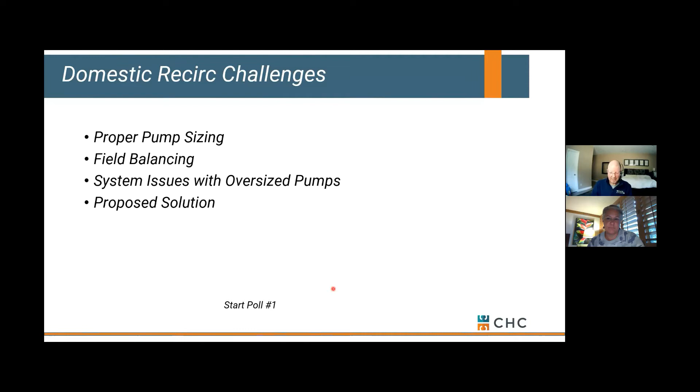Let me describe what happens in the typical hot water system. This could be a home, meaning a residence, could be light commercial, could be an apartment or a hotel, could be a multi-story high-rise, doesn't matter. It's all kind of the same as far as what's happening.

Every place that we have a load, this might be a shower, might be a hot water faucet, might be a kitchen sink, might be laundry. Each one of these might be a hotel room or an apartment. Any place that's using hot water, we're going to consider a load.

Anytime somebody is using hot water, cold water from the city comes in, picks up heat through our water heater, whether that's a storage tank or a tankless type, any appliance that's generating hot water, and we send that hot water out through our riser. It circulates out or gets pushed by city water and ends up at our load, which might be a shower again, or kitchen sink, you're washing your hands, okay?

That's what's happening in a typical hot water system. City water comes in, picks up the heat from our water heater where we're storing it as hot water, and then sends it out to our system where we can use it, okay?

But what happens in the middle of the night when everybody goes to sleep, assuming this might be a hotel? The exception might be Vegas, but at 2 in the morning when most people are sleeping, and there's no load going on in the building, everything kind of goes stagnant or no flow at that point. If there's no load in the building, there's no water flowing.

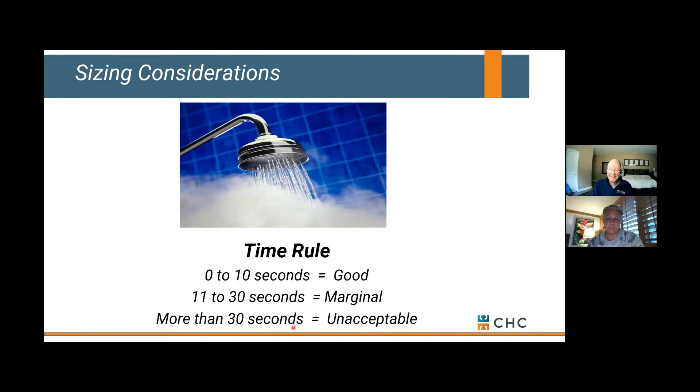Now, if they're getting hot water to their shower, that would tell you that the water heater is working. But if it's taking them 10 minutes to get hot water to a shower in the morning, it would tell you there's a problem with the recirc. Think about it - if the recirc's not running or there's an issue there, then all this water that's in the riser that has cooled off overnight has to get flushed down the drain before the hot water can replace it and end up out here at the furthest fixture. So that can lead to quite a delay.

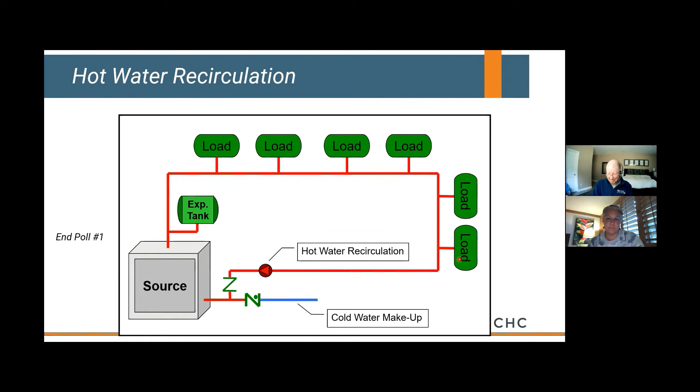That's all that's happening in our domestic recirc. Let's talk about how we size that pump. Again, all we have to do is overcome the heat loss that's occurring in our main riser when there's no load in the building, and that line's basically stagnant.

There's a heat loss table we can reference. We can also use industry rules of thumb for delta T, or change in temperature between what we're sending out to the system and what we'd like to see come back on our recirc. Typically that's a 5 to 10 degree delta T - 10 is a lot more acceptable. If you look at a master mixing valve, a lot of those require at least a 7 degree delta in our system. They need a source for cold water, which means we can't come back too hot with our recirc, or this valve starts to hunt and has some operational challenges.

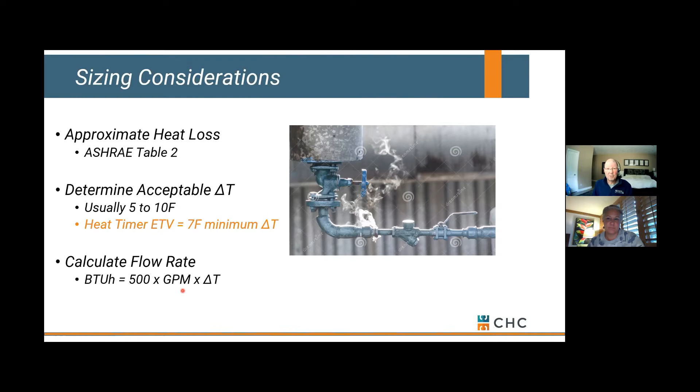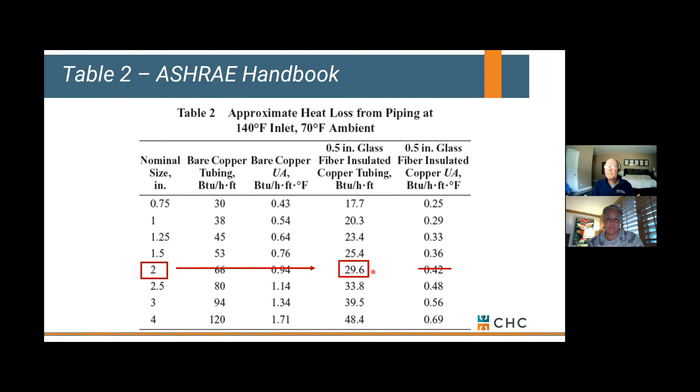If we know our heat loss in BTUs and we know the delta T we'd like to see in our system, we can figure out our flow rate for our recirc that's in question - that's all we're doing here. So we could look at a heat loss chart. Let's assume we've got a 2-inch riser that has half inch insulation around it. Well, that 2-inch riser can lose roughly 30 BTUs per foot. So all we have to do is figure out how much piping we have, and we can figure out what our heat loss is.

So quick example, let's assume I've got a building with 500 feet of 2-inch main riser running through our system, and I've got 500 feet of piping total. It loses 30 BTUs per foot. So 30 times 500 gets me to a total BTU loss of roughly 15,000 BTUs.

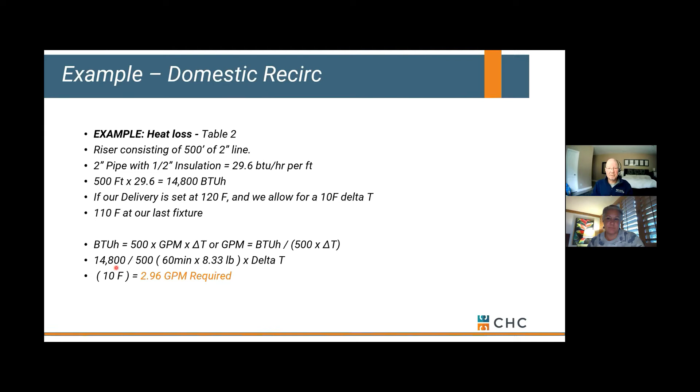Okay, so now I've got a pump sized for 3 gallons a minute. Pressure drop through a 2-inch line is going to be very minimal at 3 gallons a minute, it's sized for much larger flow rates. But what I am concerned about is from my furthest load back to the mechanical room or back to my water heater, what line size am I going to use for this section? It's typically not 2-inch, it's usually a half, 3/4, or 1-inch. We're going to size that based on the flow we need for our recirc pump. In this case, 3 gallons a minute.

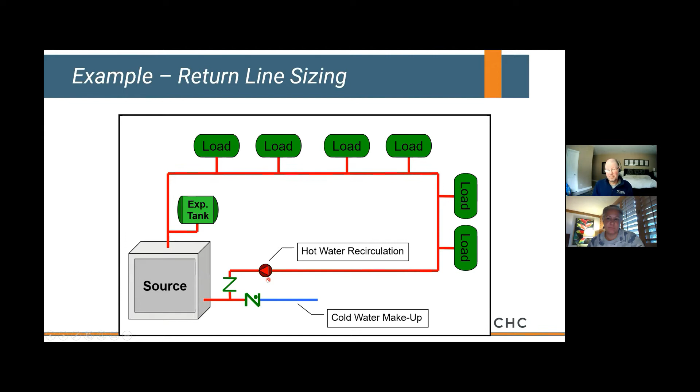So we can use our System Syzer, or an electronic version of that if we want to start looking at line sizes. If I run 3 gallons a minute through 3/4 inch copper, I get a pressure drop of about 2.8 feet per 100, or a velocity of about 2 feet per second.

Whenever we're doing domestic recirc, keep a close eye on velocity. We don't want to move it too quick. I'll get to that in just a minute.

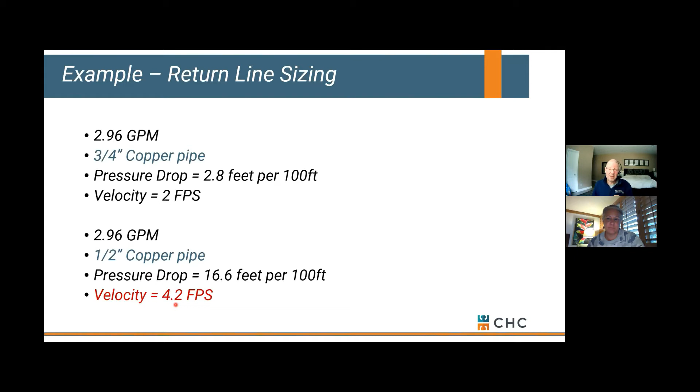If we choose a 1/2-inch copper pipe for our recirc line, again, from the furthest fixture back to the mechanical room, it can still handle 3 gallons a minute. The pressure drop goes up as well as the velocity, so I have to be careful on this velocity number. Again, I can use an electronic System Syzer to give that same condition. There's a number of tools you could use to figure out what line size you would choose or recommend based on a given flow rate.

Okay, so that's all we're doing here. Now, why do I care about velocity? Well, guess what? A lot of domestic recirc is based on copper pipe. And if you move water too fast through copper, you can erode it from the inside out, specifically around 90s, which is where you see very high velocities. As water is making a turn, it's pretty turbulent there, so velocity can be damaging to the copper because it's soft material.

So most people are going to, if your water is less than 140 degrees, be looking at a max velocity of 4 to 5 feet per second, so you don't erode your copper from the inside out. For me personally, I'm always looking at 4 feet per second or less, I just want to be safe. If you're starting to see pinhole leaks in your system, that's a pretty good indication that you've got too high a flow going through it. If you're doing really hot water, like to a kitchen or laundry that needs 160, 180 degrees, you want to slow that down even more because you've got air in that water, it's hyper aggressive. So watch your velocity, and if you're having pinhole leaks in a system, that's a good indication you're moving too much flow through it.

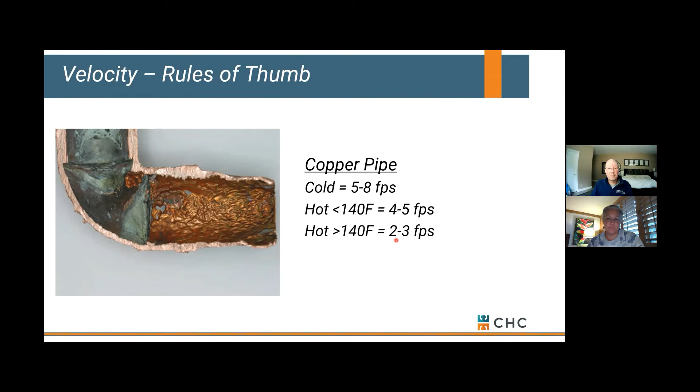Okay, so 3 gallons a minute is kind of our pump selection, and depending on that line length, if we assume 100 feet, we might only have 3 feet of head. So in general, we could pick a very small pump for 100 feet of line because we don't need a lot of flow in our recirc system. We just need to overcome the heat loss.

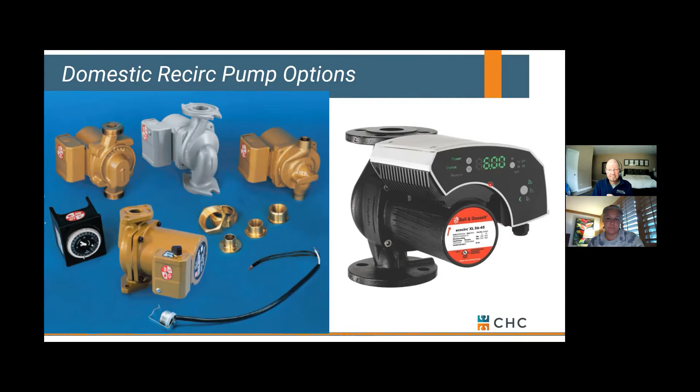We could either use a standard little wet rotor circ, or we could get into a smart pump, kind of an ECM control if we wanted to. This would allow you to control based on return temperature, so the pump would speed up or slow down based on that 10-degree delta T we're trying to maintain. You could also do the same thing based on pressure, so if pressure increases in the system, we can slow the pump down. Depends how we're going to balance things. But either way, we get a very small pump for what we call our domestic recirc.

The other thing we have to keep in mind is how are we going to balance our various floors. If it's a single-story residence, that's pretty straightforward. But if you're a 3-story hotel or apartment building, water takes the path of least resistance, so water tends to flow through floor 1 and right back to your water heater.

If you're on floors 2 or 3, you might have some delays in getting hot water. So how do we get our recirc up to floors 2 and 3? Well, we start to choke down a balance valve. As we do that, we make it harder for water to flow through floor 1 and easier for water to head up into floor number 2.

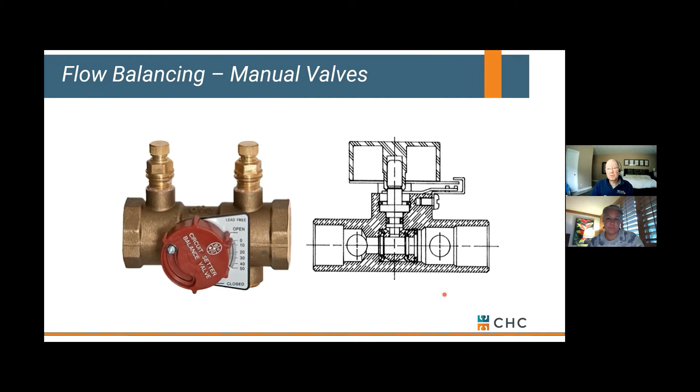You could also look at some type of automatic flow control device. These tend to be ordered with a fixed orifice, so you could select each floor for half or 1 gallon a minute, whatever you'd like to see on that particular floor. It's a spring-loaded cartridge that fluctuates with pressure to maintain a set flow. You're going to have a higher pressure drop across this valve, but they kind of self-balance once they're installed.

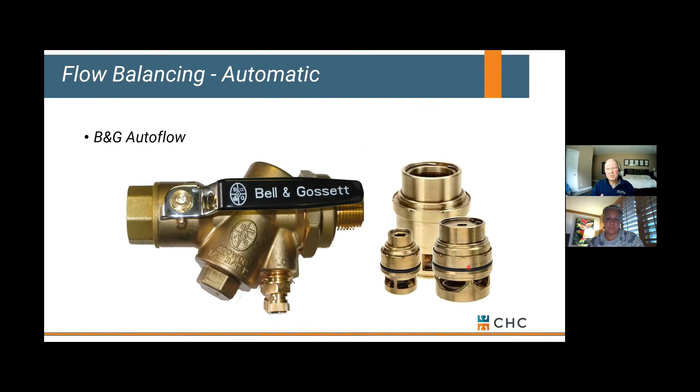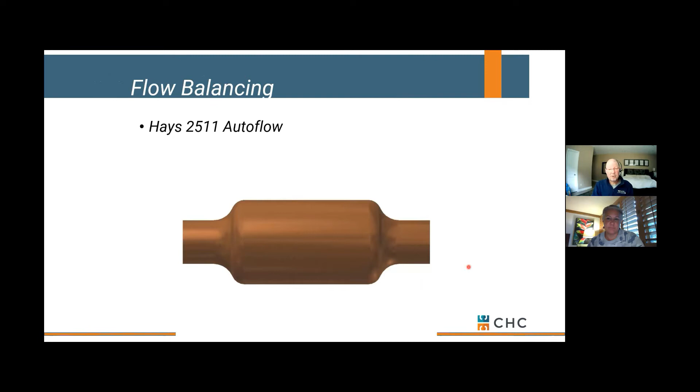Some manufacturers also offer you a copper autoflow. Basically it's a piece of copper, and if you open it up, there's an autoflow cartridge inside of it. We're not worried about low lead concerns since it's all a copper material. Very easy to sweat in line, and you're off and rolling.

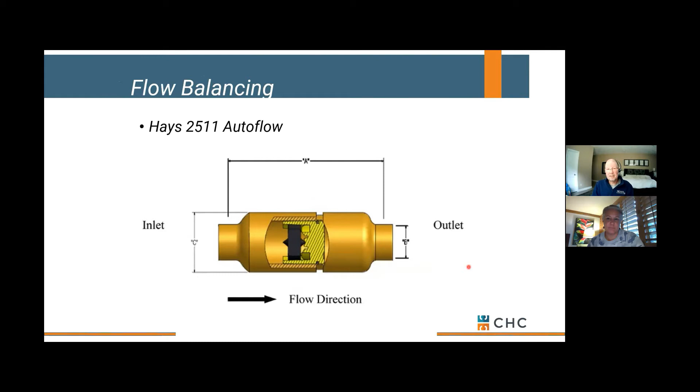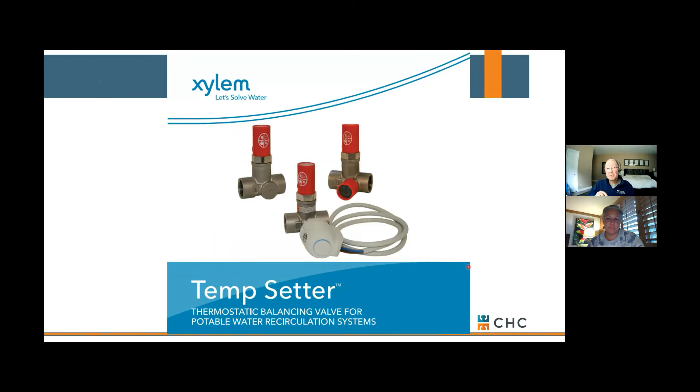If you're looking for a smarter option, B&G does make something called a temp setter. It's a wax-filled element that will allow water to flow or not flow based on return temperatures, so it kind of modulates itself. It's a smart valve. It always has a minimum flow going through it, but if your riser cools down, it's going to open up and allow more flow from your recirc pump. As we get close to set point, it's going to slow itself down or modulate itself close to closed.

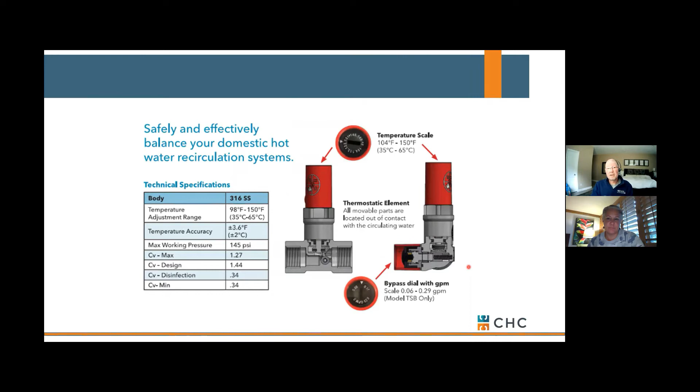This plays very well with an ECM or a smart pump where you could stage that based on pressure and let your pump speed up or slow down as this valve opens or closes. Okay, all different options as far as flow balancing.

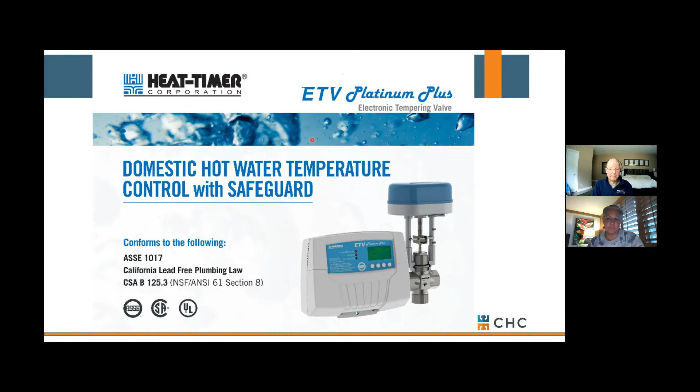With a master mixing valve, one of the things you'll see when you select a certain valve size, we tend to pick them for a 5-pound pressure drop based on a set flow rate. So whatever our design flow is through that 2-inch riser, we're going to pick a master mixing valve to match that. The thing to be careful about - a master mixing valve might require a minimum recirc flow.

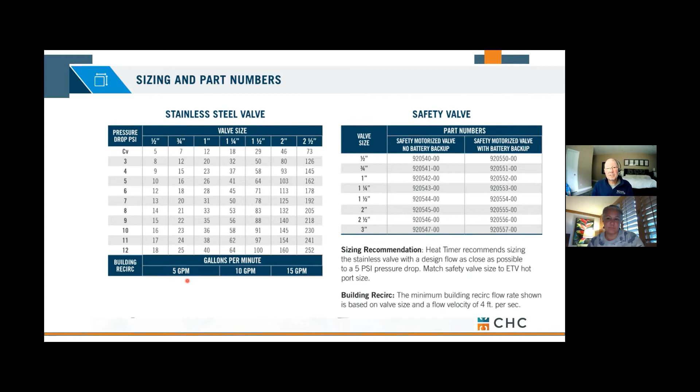So even though we've calculated 3 gallons a minute, the master mixing valve might require 5 gallons a minute. Is this a problem? As long as we account for that line size, if we size our recirc line for 5 gallons a minute, not 3, we should be just fine. There's a number of factors in sizing that recirc - one of them might be what's the minimum flow required by our master mixing, regardless of what's happening in the system. It's just a matter of balancing that out.

All a master mixing valve is doing is taking some hot water that leaves our water heater, and it's blending it with cold water coming from the city, or in our case, sometimes cold water coming back from our domestic recirc. That's why we need that 10-degree delta T to source cold water when there's no load in our system. That cold water mixes with the hot water to provide tempered water out to the system. So you might have 140 here leaving the storage tank, and 110 coming back from our recirc, with the goal of providing 120 out to the system.

Pretty simple, but it gets screwed up all the time. A lot of it has to do with not only how we pipe the master mixing valve, but how we tie the recirc back into it. The recirc has to be able to flow not only through the water heater, but also to the master mixing valve.

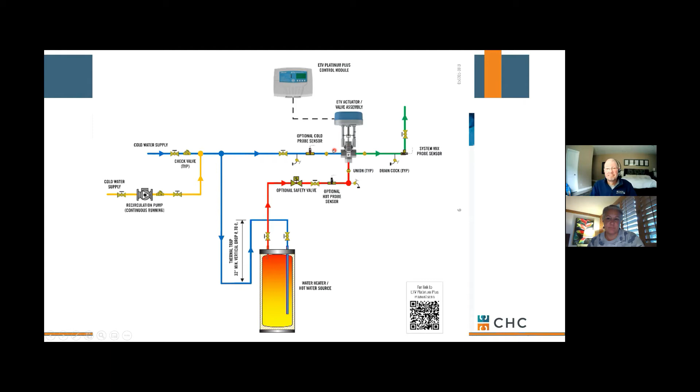I'm going to fast forward through this, but we're just showing an open versus a closed system and the source of cold water going to that master mixing valve.

Forgive me, a bit of a crash course. If we can help with recirc issues - one thing I haven't touched on is various pressure zones, like a high rise, like the Bellagio shown behind us. There's different ways to approach that, but overall a recirc is very simple. You just have to make sure you don't oversize it. And when it comes to a master mixing valve, you have to make sure you tie them in together correctly. We see a lot of issues in the field from people who overlook that.

Sunday, are there any questions before we move into pressure boosters? There is one. We see a lot of engineers sizing the pump head per the building height instead of friction loss. Can you spend some time talking about the difference? Oh yeah, don't do that.

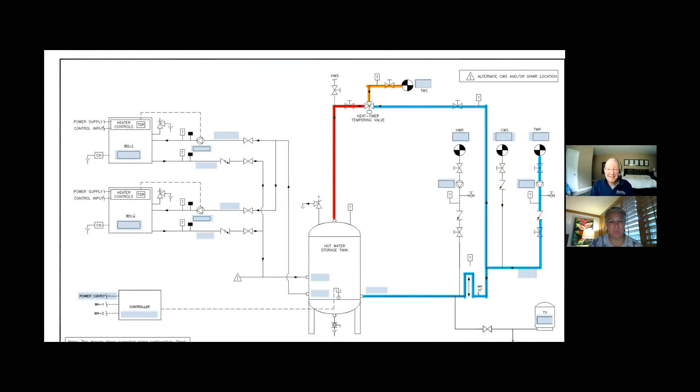Let me bounce back. Yeah, so just remember, this pressure drop through this recirc should really only be the line loss between the return line right here and the mechanical room. This pipe is already full of water - the city is taking care of that for you, or a pressure booster, depending on your system and how tall it is. But yeah, this recirc only has to overcome the friction loss between the mechanical room and the furthest fixture. So this is a friction loss - it has nothing to do with lift in the building.

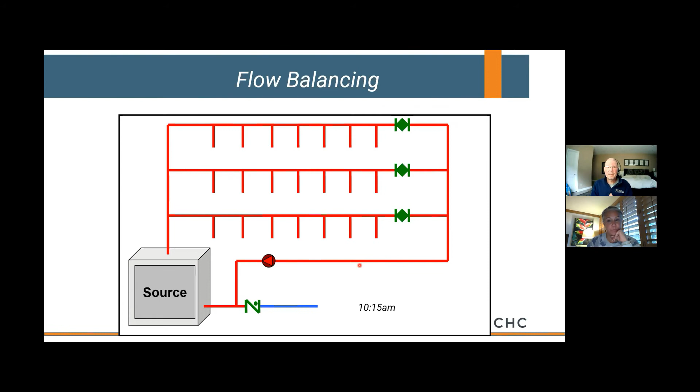So yeah, if we can help on an example, glad to do it. If you want us to run the math on how we would come up with a recirc size based on your riser diagram, happy to do it. It'd be a lot to do here today, but if you want to shoot us something offline, happy to get involved with that conversation for sure. Very good question.

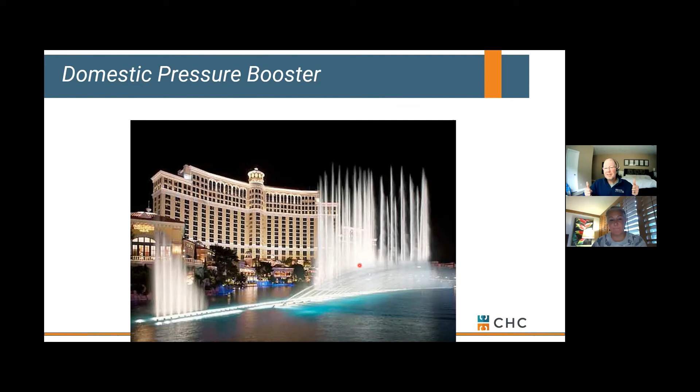We're filling a pipe full of water, and we're adding some pressure behind it. Typically you've got city water that comes into your building, and it's going to fill that pipe full of water. But sometimes your building's too tall, and you don't have enough city pressure to get it all the way to the top of your building. So what do you add? Something we call a pressure booster - simply a pump or set of pumps that run in order to maintain a minimum pressure up in our penthouse or highest spot in our piping. That's all we're doing with the pressure booster. We're boosting pressure - doesn't get much simpler than that.

We make it look really nice - it's a fancy skid, control panels with a lot of buttons on it, lights, alarms, things like that. But you break it down, it's a pump that's spinning to generate some pressure in order to maintain minimum pressure up in the penthouse. We're simply boosting pressure.

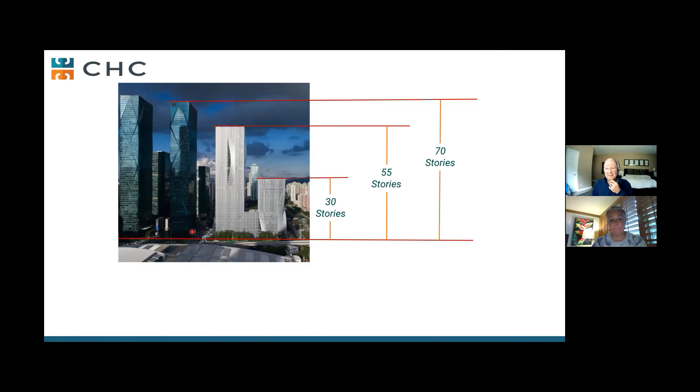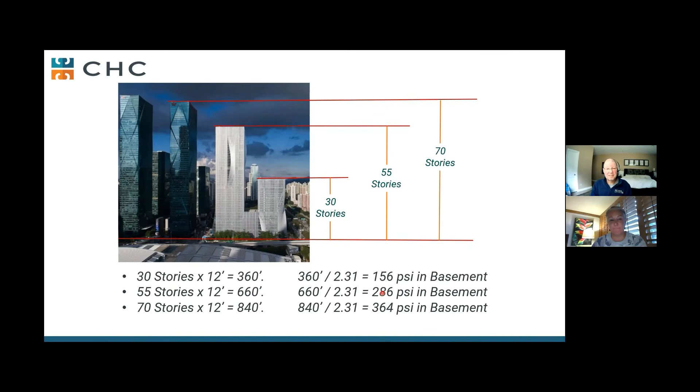Now, something to keep in mind - all of these buildings might require 30 or 40 pounds at the penthouse. But based on the height of the building, we're going to see a lot higher pressures in the basement of a high rise, a 70-story high rise, than we would a 30-story high rise. So our boost pressure, or the pressure seen in the basement, is going to vary dramatically based on the height of the building. Water has weight - if you're trying to maintain 30 pounds at the penthouse of a 30-story building, we might see 156 in the basement, or a 55-story building, we might see closer to 286 pounds in the basement. All that comes into what pump we select, max rating on our headers and components. All that needs to come into consideration.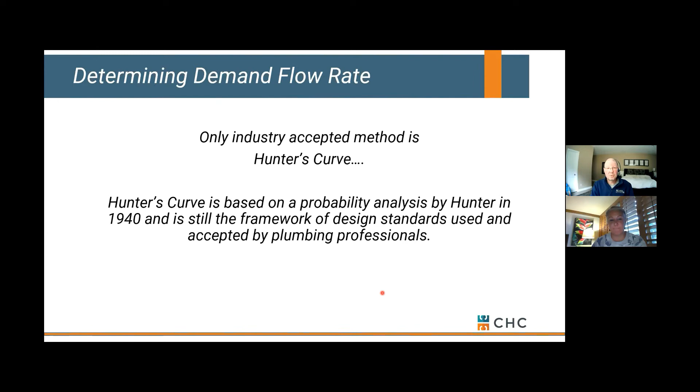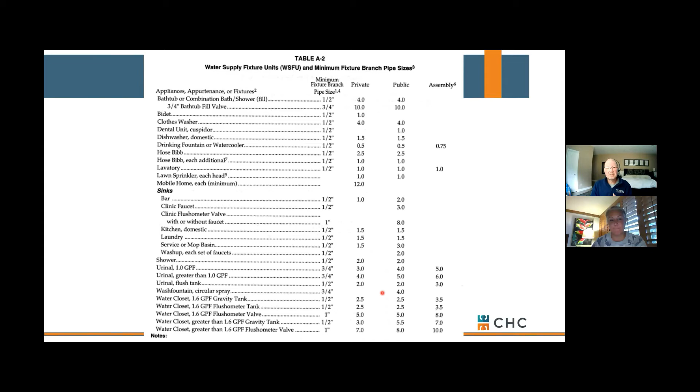Now, one of the things we need to look at first is how do we figure out our flow rates? What flow do I need out of my pressure booster? Well, that tends to fall on something we call Hunter's curve. It's established in the 40s, a very conservative selection if you will, but at this point it's one of the few industry standards that we have to roll on. Typically, all you're doing is totaling up your fixture counts based on how many showers you have, whether they're private or public - same with lavatories, laundry, kitchen. All those add up, and then you run it into Hunter's curve, and based on the number of fixture units that you have, that equates to a given flow rate.

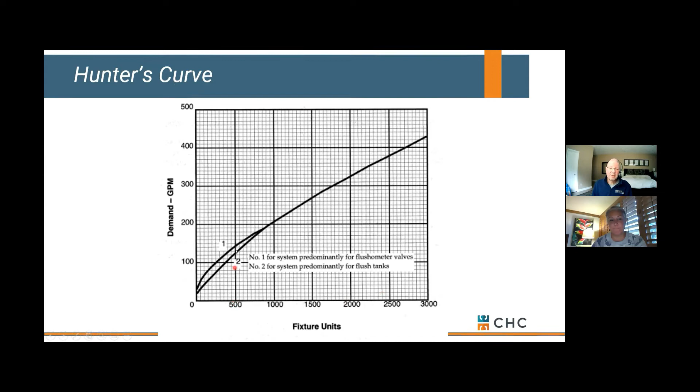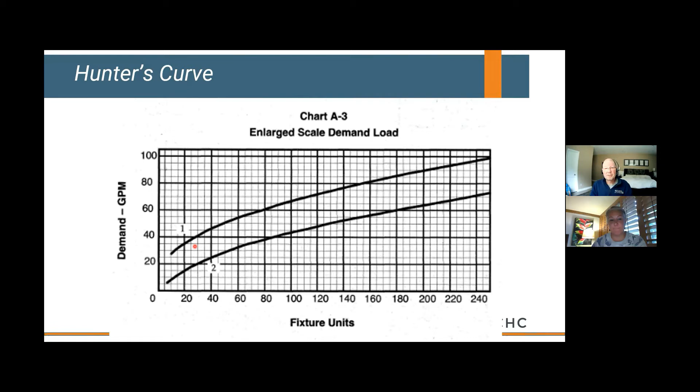Okay, and there's various scales for this, but they're all based on Hunter's curve. Typically for me, most engineers are giving me the flow rate. They're kind of responsible for that. Occasionally though, you'll get somebody who just wants to give you the fixture units and is relying on you to come up with flows. Hunter's curve tends to get you there.

Now, once you have flows, you have to figure out, okay, well, how many pumps am I going to use if I need a pressure booster system? Well, you could use just one pump. That's cool, until there's a mechanical issue with it. And then all of a sudden the building's out of water pressure, which isn't great.

Most people on the commercial aspect are looking at least two pumps, so if one fails, they still have another to kind of back it up. You could also look at a 3-pump or sometimes a 4-pump system.

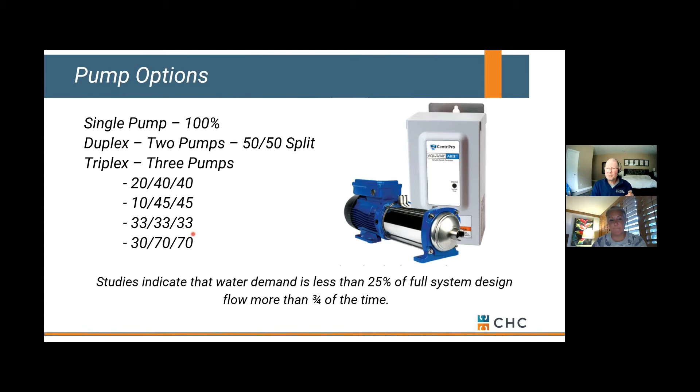One thing I should throw out real quick, a lot of these used to be constant speed. And as a result, we would see what we might call a jockey pump scenario, where you had a very small pump as kind of the lead pump, small horsepower, but it ran all the time. And if loads exceeded what that small pump could do, you would bring on a larger lag pump or backup pump. Now that we're going to variable speed for most of our pressure boosters, we tend to see equal splits, so we can equally rotate our pumps through and the horsepowers are consistent. But you might see that more in the field. If you see a very small pump, it's probably set up as a constant speed with a jockey.

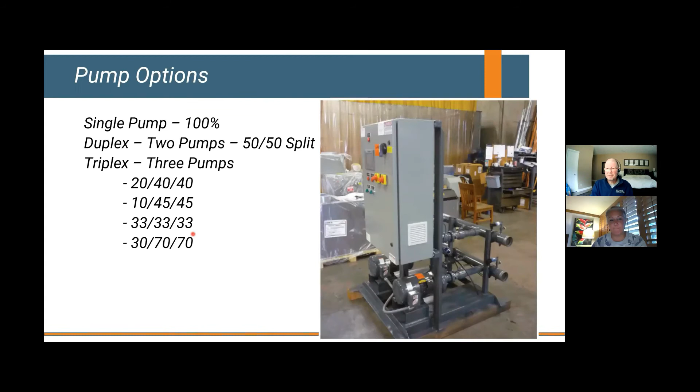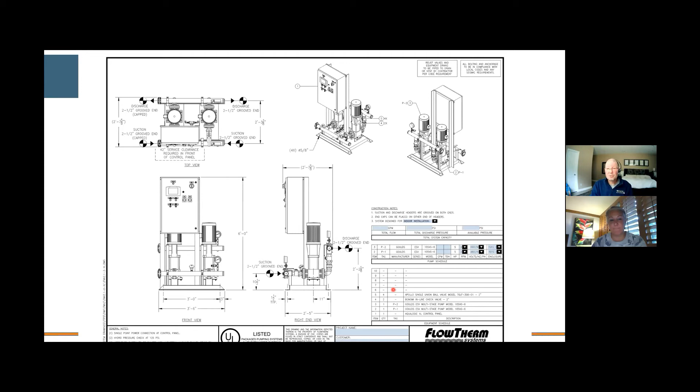You've got a lot of options. Whether you do, there's a lot of different configurations for you. I don't need to get into this real heavy, but you can go horizontal or vertical with your pumps based on floor space. You can go to a triplex system if you like. And if you want to go crazy or you have a very big load, you can go to a quadplex or a 4-pump system. If you're a data center, sometimes they want multiple control panels, fully redundant systems.

Okay, in this case, we had a flow here of 1,000 gallons a minute. Okay, that kind of dictates a lot of pumps.

So rules of thumb, I might clarify this, Paul's rules of thumb. Okay, if your total system load is 50 gallons a minute or less, you might want to consider just a single pump with the second on the shelf as a standby. It might not be that critical, but it really depends on your application.

Looking at a 2-pump setup, a duplex, if you will, anywhere around 250, 300 gallons a minute or less might be a good place to consider a duplex configuration. When your flows exceed 300 gallons a minute, a lot of times you can save a horsepower by adding a 3rd pump. Also add some additional redundancy to your system.

Okay, and then if you've got very large flows in a system, 600 gallons a minute or greater, sometimes a 4-pump system makes sense. But they're all going to stage equivalently. It just takes a little bit more floor space to add an additional pump. We're going to get to hydro tanks in just a few minutes, but that's the other thing to consider is what size tank might you need with various systems. Do you need one at all? We're going to talk about that in just a few minutes.

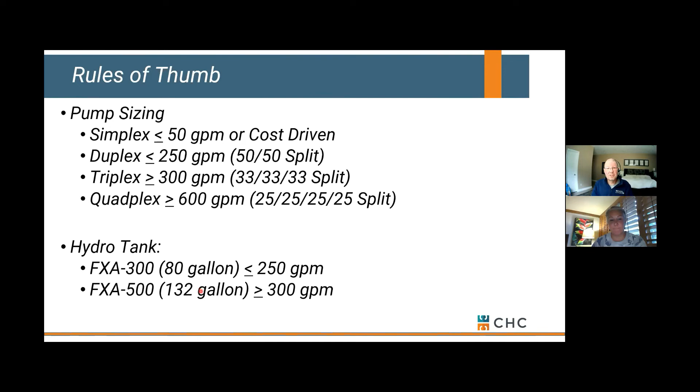But duplex, if you're 250 to 300 gallons a minute or less, we tend to default to a 300 liter or an 80-gallon hydropneumatic tank, a well tank. And if you're greater than that in flow, we'll tend to go to a larger tank, 500 liter or 132 gallons. Why those magic numbers? Two reasons. We stock them. And it's also kind of a price point that the industry will bear as far as an adder to a pressure booster. It doesn't break the budget, but there's definitely an advantage to adding a tank. We'll talk about that.

Let's look at a typical system for a pressure booster. We tend to have some pressure losses that we need to account for. One of them is the height of the building. We talked about that already, and that's important for a booster, but it's not for a recirc.

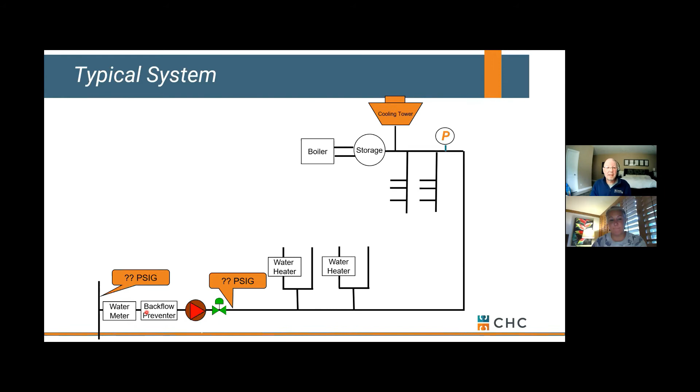The other thing we need to look at is line loss, friction loss in the system. But on the suction side, prior to the pump or booster, we usually have a water meter and a backflow device that also eat up some pressure. We normally have city pressure at the street, then a water meter and backflow that are also taking away from that pressure. So we have to account for all that when properly sizing our pressure booster.

Now a quick example. Let's say we have a 13-story building that's 156 feet tall. Usually we assume 12 feet per story. If I do some quick math, I can figure out that I need about 68 pounds in the basement to get water to the very top of the building.

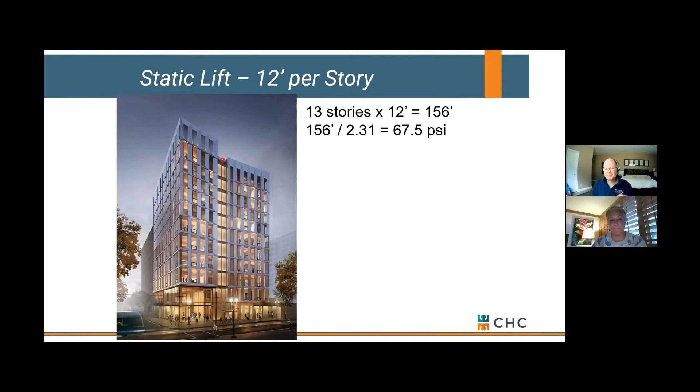What's not accounted for here is that water at the top is going to be at 0 pounds of pressure. If I've got somebody who needs a shower up there, they might need more than that. So typically we design for 30 or 40 pounds minimum at the very top of the system.

Getting water to the top, I might have some friction loss in the riser that serves the building, so I need to account for that. If I'm using a hydro tank, I need a pressure band for that tank to work on, so we need to account for that as well. And then my pressure booster might have its own losses, like a check valve, losses through some headers, and or isolation valves. All of that comes into play.

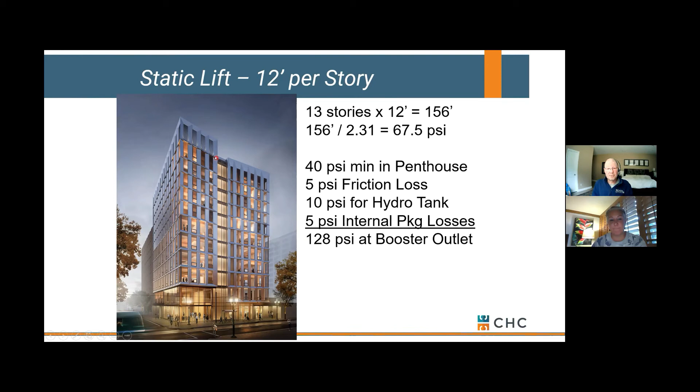So if I had 68 pounds in the basement, I'm not really going to serve this building too well. If I have 128 pounds in the basement, now I can do something. Somebody can take a shower up there with 30 or 40 pounds of water and be comfortable in their nice penthouse.

Okay, back to our little riser schematic. My booster is controlling to 128 pounds of discharge pressure in order to maintain a minimum of 40 pounds up in the penthouse. That's all that's happening. Very simple.

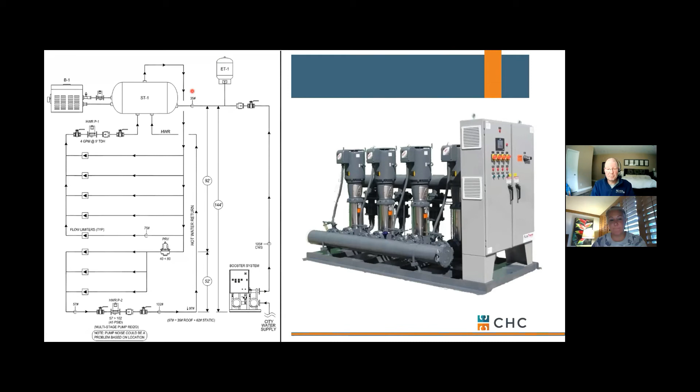Now we have a worksheet that we tend to send out to a lot of engineers because we get tired of asking the same questions over and over again. No offense to anyone on this call, but the first thing we need to size a booster is what's our flow, okay? And normally that's specific to each building.

We also need to know what kind of pressure we have available to us at the street, or we take a guess. Typically it's anywhere from 40 to 60 pounds, at least in Portland. And then we need to account for our water meter and our backflow, okay? Those do have a substantial pressure drop we have to account for.

So think about this: coming into our building at our pump location, we might have 44 pounds of pressure available from the city. We know, based on our building height and minimum pressure in our system, we need 128 pounds of pressure in our basement. Well, 128 minus 44 gives us a boost pressure of 84 pounds.

Once I know that, now I can go select a booster, okay? Now the difference would be if you're pulling out of a break tank or a day tank, these numbers go to 0, okay? But if you have access to city water, that's an advantage for you.

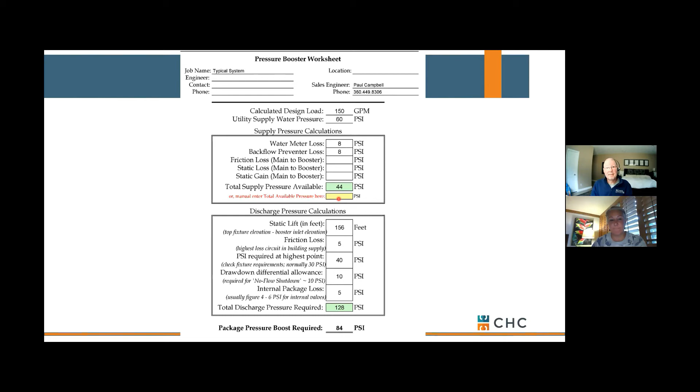So again, if I'm trying to select a booster for 150 gallons a minute at about 84 pounds of pressure, I can just roll over where those lines intersect and select a booster. Most manufacturers have selection charts. We have our own in-house that we're happy to share, but it makes it very easy to select a booster.

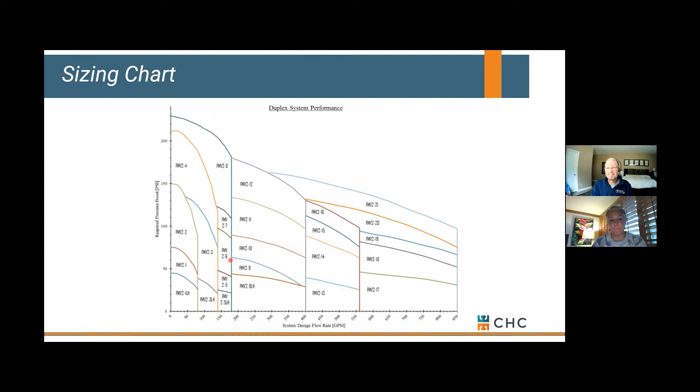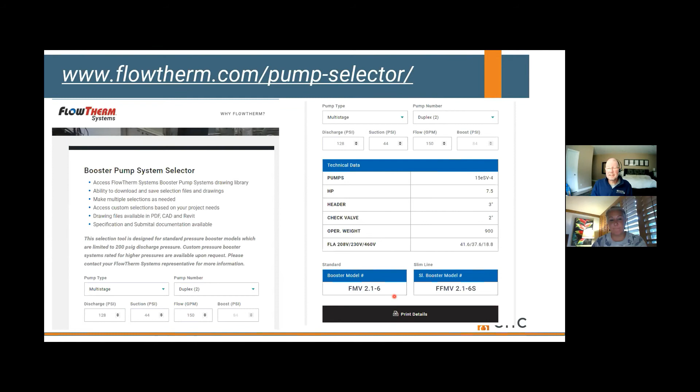Okay, we're doing all right.

One of the main components, forgive this slide because it's not really interactive, but I wanted to touch on the brains of this system that we call a control panel. It's doing a lot of monitoring for us, but operation-wise, it's very simple.

It is controlling pump speed based on leaving pressures. So if we're targeting 128 pounds in our system, it's going to speed up or slow down our pumps to maintain that 128 pounds. It tends to monitor this every 2 to 6 seconds. So as pressures fluctuate and loads change in our system, it's telling the pumps, hey, I need more pressure or I need less pressure, and they speed up or slow down. It's really that simple.

There are minimum run times for the pumps, and if we satisfy that minimum run time and the booster thinks it's okay to shut down because it's been at the same speed for a while, one thing the control panel will do is bump system pressure. It'll raise it by about 5 pounds, then check whether that pressure stays high. If so, it means nobody in the building is using water, and it's okay to shut the pumps down. If that pressure drops, somebody's still using water, and the pumps continue to run. It's all part of a sequence.

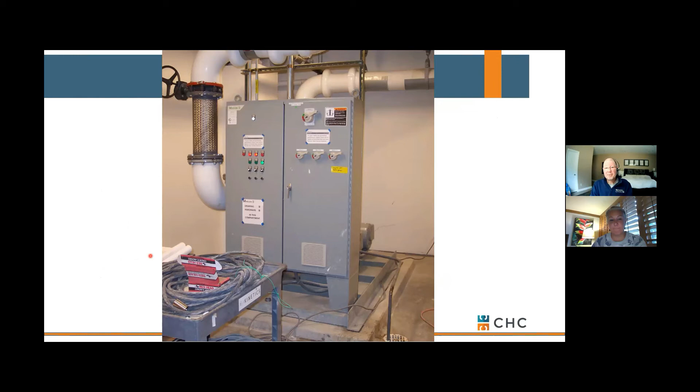An old school panel, forgive me, this isn't what we're seeing a lot of today, but if you looked inside, this might give you a better feel for what's happening inside a typical control panel. There's a main disconnect for all power so you could service this, and also individual disconnects for each drive, which are tied to each pump. So if you had to take a pump out of commission, you could do that here.

Controller, transformer, and the thing that's unique here are cooling fans. If you have drives inside a panel, they give off heat, so you need to cool them down with room air. If anybody's looking for a spare toilet paper, got you covered.

Obviously pre-COVID, you might see boosters that are a little smarter these days, where they're using ECM motors and drives that are mounted on the motor itself. Much smaller control panel, with a touchscreen control interface that's telling the drives and/or motors what to do, speed up or slow down. A lot more compact footprint.

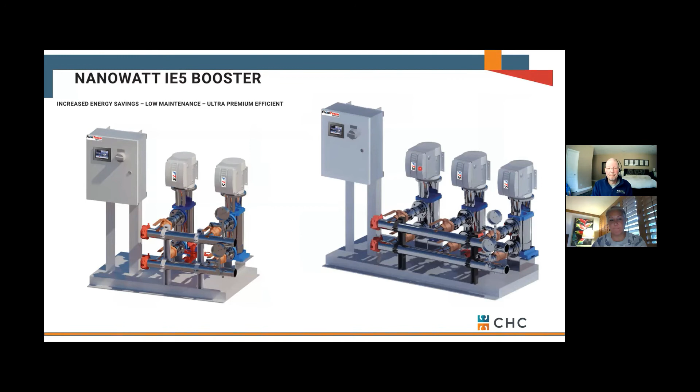Touchscreen controls allow you to set your pressures and your minimum run speeds for your drives to maintain that system pressure. There are also a lot of alarms that the control panel is watching for, like max pressure, minimum pressure, and a lot of other things it's tracking.

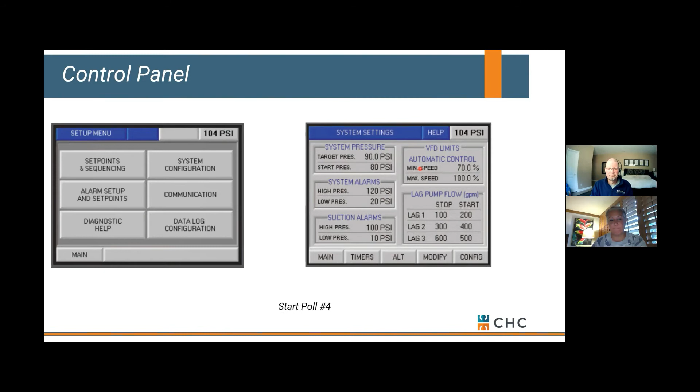Okay, I've got a poll for you. Let's see where we're going with hydropneumatic tanks. Bear with me a second here, let's launch our second to last poll. Keep an eye on time.

I'm going to fast talk through you on hydropneumatic tanks. Why do we use them? Where do you put them? How do you size them?

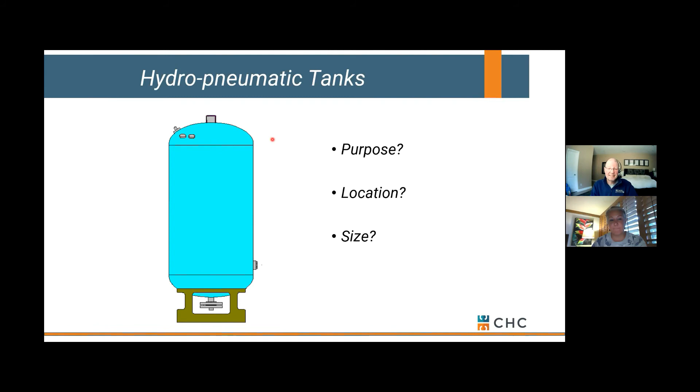Let's talk about an old school system. What did we do in the old days? We had a city water line that came into the basement of this building, and a pump that simply transferred that water up to the top into a gravity storage tank, open atmosphere, working on a float valve. As that float valve satisfied, the pump in the basement would shut off. As people used water in the building, the float dropped, the pump would come on and reestablish that water level.

Seismically, a bit of a disaster. If this building starts shaking, you don't want to be down here on the sidewalk. Also, if you paid a lot of money to have a penthouse with a nice view, you didn't have a lot of water pressure up here. Your only water pressure was limited to the height of the tank relative to tying into the building.

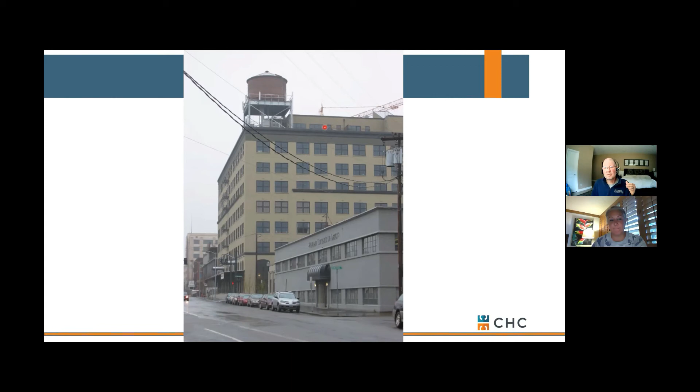So these days we're getting away from those gravity tanks. Surprisingly, you still see a lot of them in New York City, but with new design, what are we doing? We're capping this right here and adding additional pressure in the basement with some type of variable speed pressure booster. So the guys in the penthouse will have their 30 or 40 pounds of pressure without having to elevate this tank really tall.

Let's assume that we're going to cap our riser and that we've got a minimum pressure in our penthouse of 30 pounds. This works just like an expansion tank—a little bit different, but very similar. If our minimum pressure in the penthouse is 30 pounds, we're going to want 30 pounds of air set up into this tank, so those pressures match.

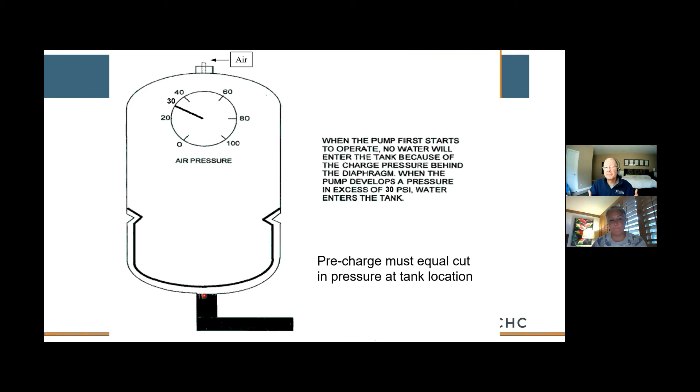Now guess what? When we get to 29, we start our pressure booster and build pressure. Remember that 10 pounds we added into our sizing? That extra 10 pounds goes to add more water to this hydropneumatic tank. When we add more water to it, our air compresses and gets higher in pressure. Now our pump satisfies, shuts down, and our pressure booster is no longer running.

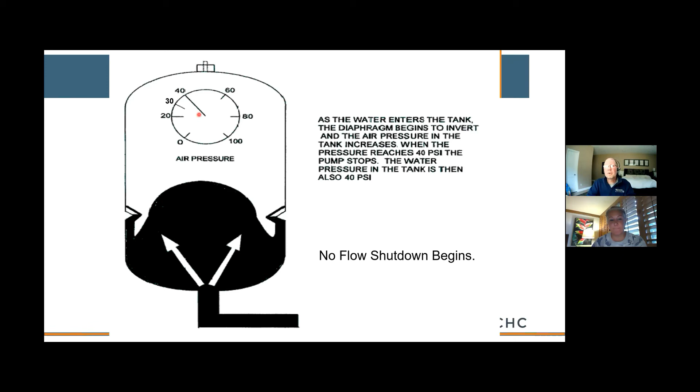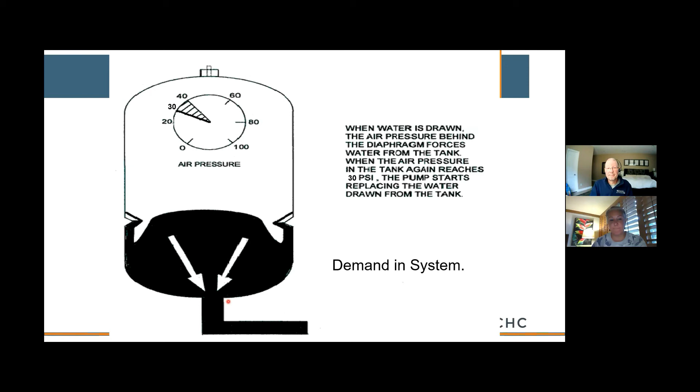But in the penthouse, we now have 40 pounds of water pressure because we've got 40 pounds of air behind it. When somebody opens a faucet or takes a shower, that 40 pounds of air pushes the water back out into the system. This water heads out to meet the load, and when it gives up its volume and drops to 30 pounds, we start the pressure booster again. That's what's happening with the hydropneumatic tank—it's storing water and giving it back to the system while the booster's not running.

A couple real important things: most hydro tanks have 1.5-inch, 2-inch, sometimes 3-inch connections. You want to make sure you run that full line size into the riser. You don't want to neck this down from 2-inch to 3/4-inch and run a 3/4 line into the system—you can't get a lot of water out of that tank with 3/4-inch line. So run full size from the tank into your riser connection.

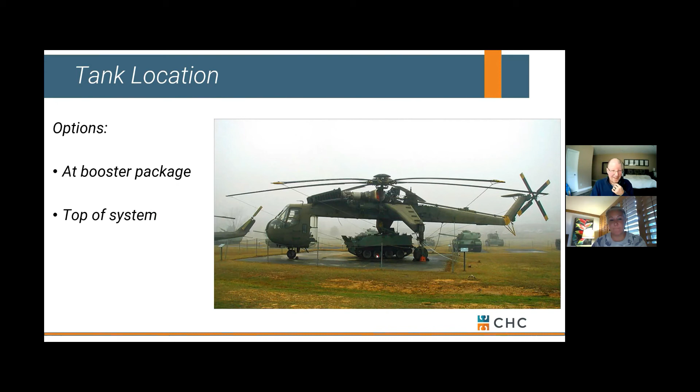Now, I hope you appreciate the play on this picture. Okay, this is our tank. The question is, where do we put it? Do we put it in the basement or do we put it in the penthouse?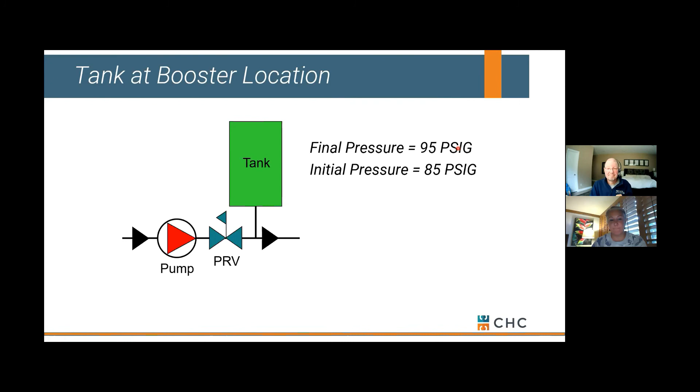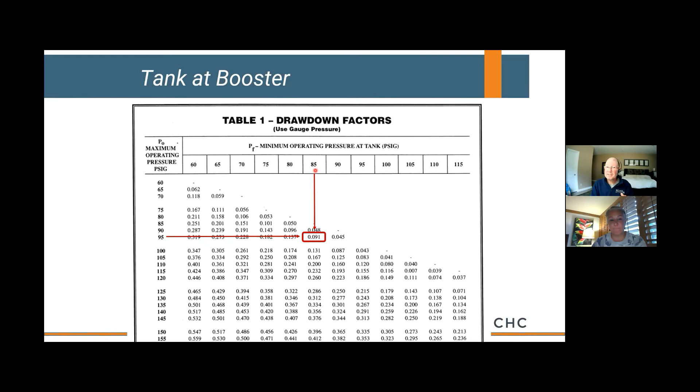Let's assume some pressure's in the basement—I'm just making up random numbers here. Let's say I need 85 pounds as a minimum, and with my booster running I'm targeting 95, so that's my 10-pound band. Hydro tanks run off of something called a drawdown factor, working on the pressure band in our system. If our minimum's 85 and maximum's 95, that gives us a drawdown factor of 0.091. That means if you've got a 100-gallon tank, you'll get 9.1 gallons of usable water back to the system when pressure starts at 95 and drops to 85 before we start the pressure booster.

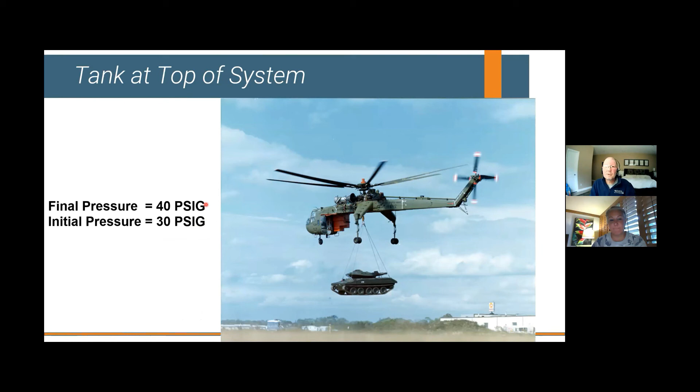So a 100-gallon tank only gives you 9 gallons usable—that's a little disappointing. If we take our tank and elevate it to the top of our system instead of the basement, we're running lower pressures up there, with a minimum of 30 and a max of 40. Going to our drawdown chart, with a minimum of 30 and max of 40, our drawdown actually improves—it goes to 0.183. So that same 100-gallon tank gives us 18 gallons of usable water. We actually get more water by having our tank in a lower pressure zone. That's a good thing.

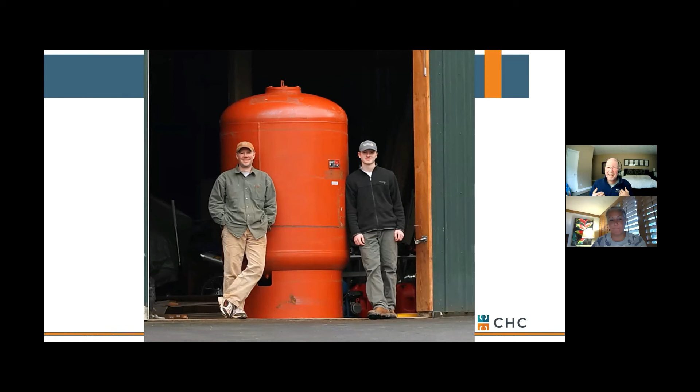If you're a corporate trainer for CHC and they have a tank they're going to take to the dump because there's a scratch across the ASME nameplate, but at home you're on a well system, you could use a big ass hydropneumatic tank. Okay, that's what this is.

You come home, you've got 3 teenagers, you come down to a drawdown chart and figure out where do I want to set things. Commercially, we tend to run on a 10-pound band so nobody complains about spiking pressures. Notice if I run from 30 to 40, I get a 0.183 drawdown factor. Residentially, most guys will work on a 20-pound band, which extends that drawdown. At home, I run on a 40-pound band. Why? Because my wife and kids don't complain, and it allows me a 0.472 drawdown factor.

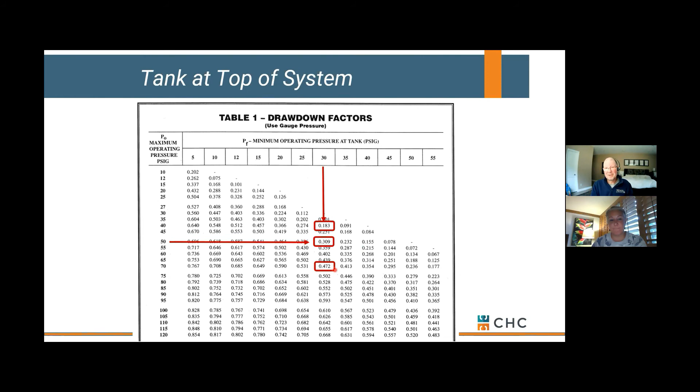What does that mean? It means that my 528-gallon hydropneumatic tank stores 250 gallons of usable water. And when my pump runs, it runs for 21 minutes, then it's off for 2 days. So I don't short cycle my equipment, and I have the advantage of a really large volume of water stored. So when the power goes out, I don't have to worry about running to the store to pick up water.

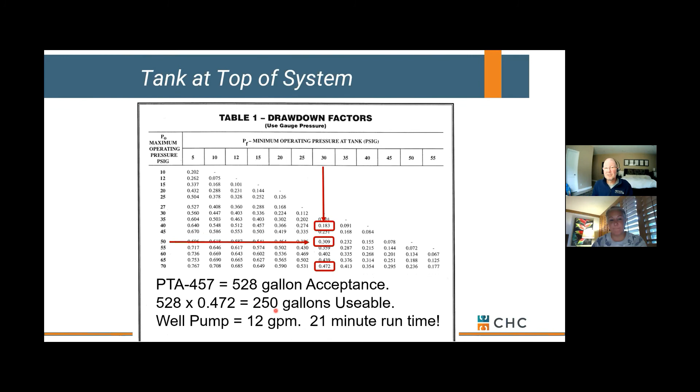Now let's talk about where you put tanks. Do you put them remote or in the basement? You might call this Paul's rule of thumb again, but if you've got a building that's less than 12 stories, it might be just as simple to put the tank right next to the booster in the basement. Hydropneumatic tanks are good to 125 pounds max working pressure, so as long as we don't exceed that, it makes the install and startup easier to have everything in the same mechanical room.

Are there advantages to putting the tank remote? Absolutely, and if you've got an easy spot for it, perfect. But is it worth fighting an architect or a mechanical engineer to eke out a little bit of space? Maybe not. That's your call.

If you've got an elevated building, something greater than 12 stories, this is the time to have that conversation. You get more drawdown out of the tank, and you don't have to pay for a high pressure hydropneumatic tank, because if you put it remote, it's running in a low pressure zone. So now you can use a standard tank and just put it remote or elevated. And by the way, it doesn't have to be at the very top of the building—it can be in a stairwell, it could be in a janitor's closet. We've seen a lot of interesting installs. Anywhere close to the main riser where you can just tie it in works perfectly.

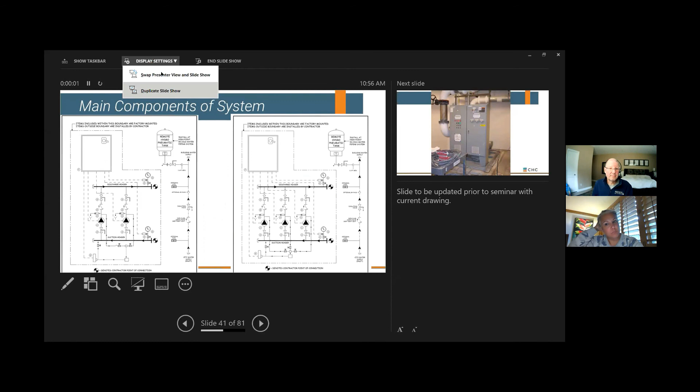Really good question. So we have tried remote pressure sensors. Let me go to a standard riser, let me go back to this guy. Bear with me a second. We've tried remote pressure sensors.

So this one on the discharge header headed out into the system, it's part of the pressure booster package. It's installed by the manufacturer, wired to the control panel. There's nothing to do in the field. So that's an advantage to having it right here at the booster.

If you take this pressure sensor, another option is to run it to the very top of our building. I don't have an easy schematic for that, but run it up to the 12th or 20th floor, wherever you want to install it. You can do that, and we've tried it.

The challenge is nobody wants to be responsible for that wiring because it's low voltage. The control contractor doesn't want to do it, the mechanical surely doesn't, and electrical tends not to want to touch it either. So that's your first challenge.

The other challenge is if that remote pressure sensor gets isolated from the rest of the system, then your pumps can run out of control because they're not seeing the true system pressure that's occurring in your riser. So we find that having it on the header is a much safer location.

Controls are smart enough to be able to offset your pressure depending on how many pumps are running. So if we're assuming a friction loss in our riser of 10 pounds per square inch, as we get 2 pumps running, instead of targeting maybe 100 pounds in the basement, we can target 110 to offset the friction loss that we're going to see in the riser.

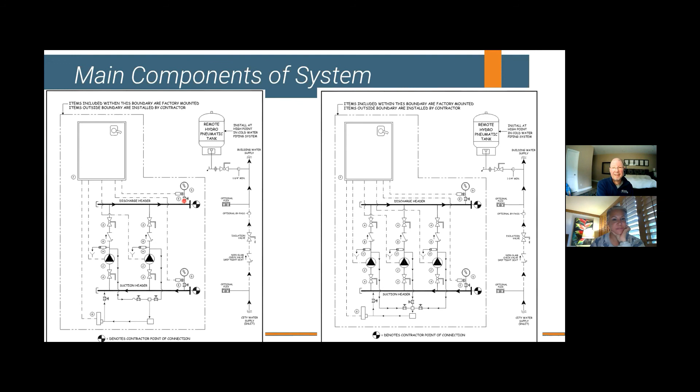Great, hope that helps. Carl said you can put the tank in his driveway. By the way, it looks like a small bomb going down the road, depending on what you're hauling it with. I got a lot of interesting looks headed there. But yeah, you're going to need a tractor or something to offload that sucker for sure.

And then Hans has a question or addition. Yeah, sure: HP tank not required?

True, the system will work, but the pressure will be all over the place and the pump will cycle on and off when a water fixture is open. The building owner won't like this result, and the pump will require much more maintenance.

Yeah, a real valid point. So Hans, to your point, HP tank tends not to be required if you can put your tank remote or elevated in a lower pressure zone, which I think is what you're referencing. Every booster startup that I've been involved with where there is not a hydropneumatic tank, the first thing the contractor asks is, so why isn't the pump shutting off?

Well, anytime there's a load in the system, pressures fluctuate slightly, and that's enough to keep that pump running. So again, if you want the pump to shut off and save you some energy, you need somewhere to store some water at an elevated pressure. So when there is a slight load or even a leak in your system, that water can give itself back before we start the pump again.

All manufacturers have very advanced control platforms, so it's not based on the control panel. It's based on whether you want your pumps to ever shut down or not. And to Hans' point, as flush valves, pressures can fluctuate dramatically in a system, and that hydropneumatic tank helps to buffer that out by having some volume there.